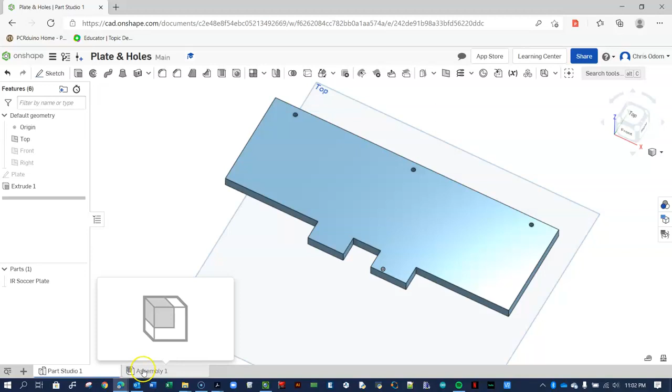An assembly is just an assembled mass of different parts. What we can do is insert the IR soccer plate that we just created. It's all in the same file, so you click and it places it in the workspace. Click OK, and there it is, same as the part.

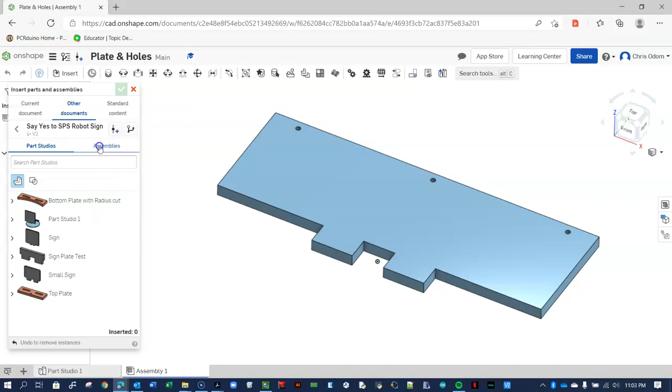But what we can do over here is add other parts to it. For example, I can go and insert assemblies from other documents, recently opened. I want to put in the little mount here, so I'm going to grab it from assemblies, other document assemblies. I click on chassis mount and move that over here for later use.

I can come back to other documents, recently opened again, and choose my line follower assembly. I need 3 of those, so there's 1, 2, and 3. I'm going to show you how we can put them all onto the board.

And then lastly, I need a spacer, a little small spacer here. I need 3 of those as well: 1, 2, and 3.

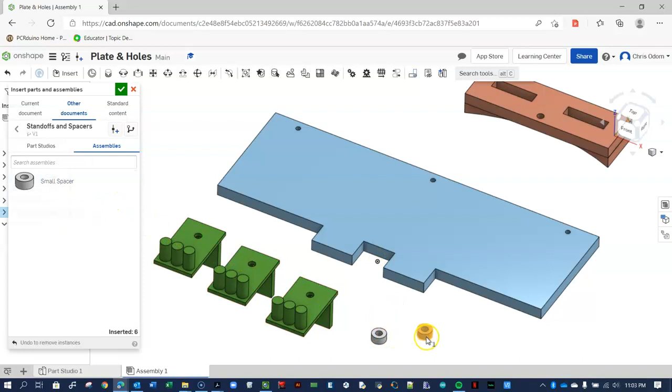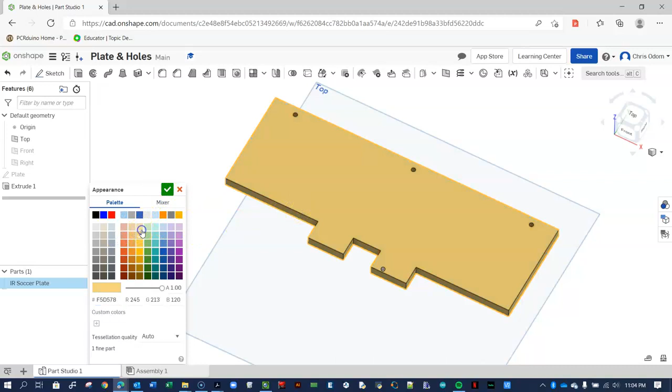Notice that these are all colored to kind of indicate what they are, and I can do that here. I can go back to the Part Studio, right-click on the soccer plate, and go to Edit Appearance, and make it some color, like a kind of woodish color. Press the checkbox, and now if I go back to Assembly, it's already updated and changed. So if I change the part, it changes it in the assembly.

Now what I want to do is put these guys on the plate. This is just cosmetic, but it does actually help you before you spend time and materials to cut, to make sure that your piece is going to work.

What we want to do is mate these to the board in such a way that they don't move. So we're going to use the fastened mate, the easiest one.

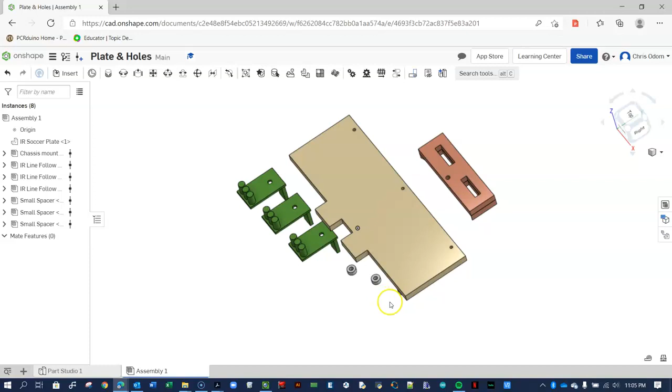The first thing I want to do is put these little white spacers here over the holes so we can elevate the line following sensor, and get it so that the resistors on the back -- these aren't great resistor drawings, but there they are, representations of the resistors -- aren't sitting on the plate itself. So we're going to use spacers to move that away.

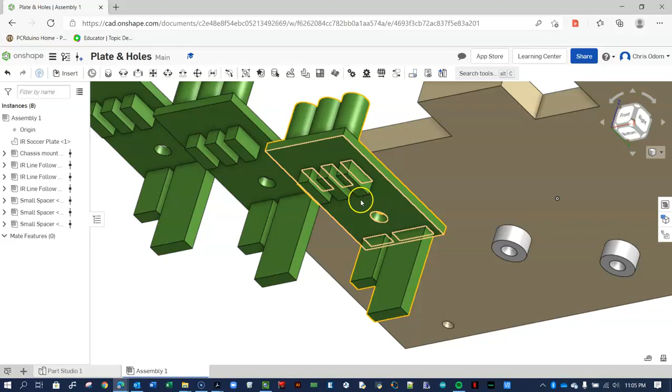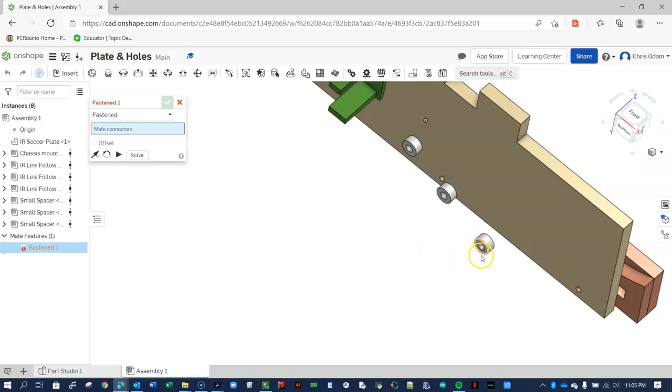All right, so here we go, here's how to do it. I'm going to be doing a lot of rotating with my right mouse button. I want this bottom piece here to mate with this top piece here, and I want the holes to be concentric. So I'm going to grab the fasten mate, zoom in with my zoom wheel, and you can see that orientation is pointing down, that's what I want. I could choose a different face, but I want this little circle, boom, right there.

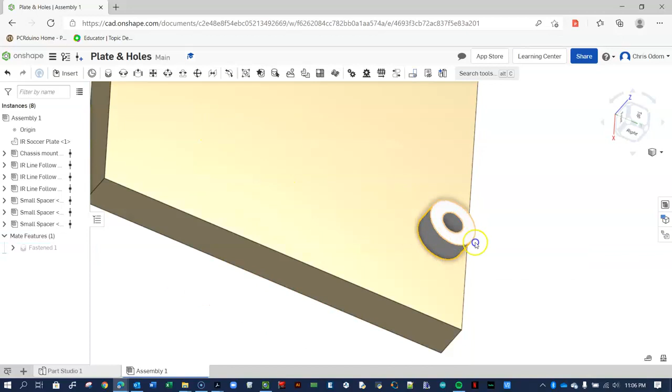So that is ready to be mated to this part right there. Okay, there they are. I mate, I press the checkbox, and we are good. That is now fastened to it. I'm going to do that 2 more times.

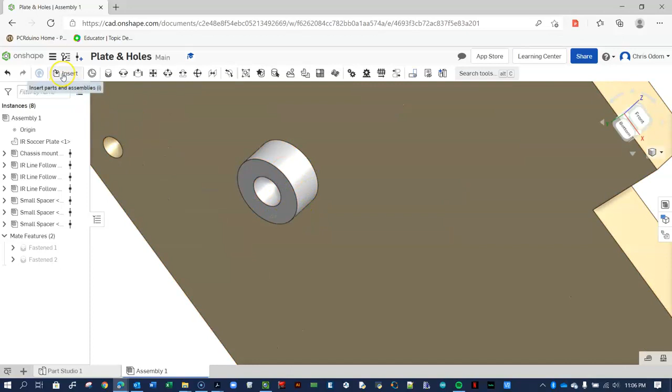Again, I want to grab the bottom of this guy here, and I will try to get the orientation. Boom. Okay, and there may be easier ways to do this. I'm kind of a beginner, but this is how it works for me, and class begins in a few hours, so I need to get on the move.

Okay, so here we go. Boom. So now, if I move the plate, those 3 spacers are going to come with me.

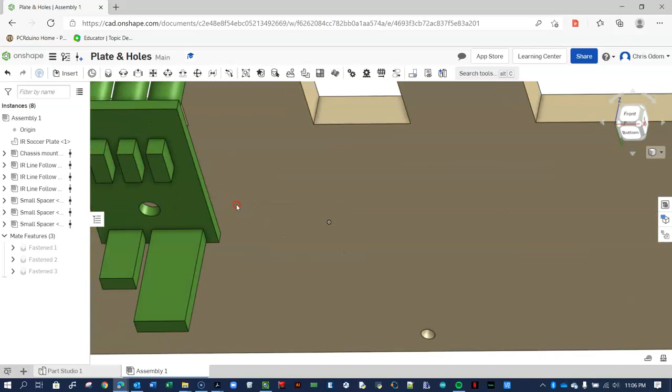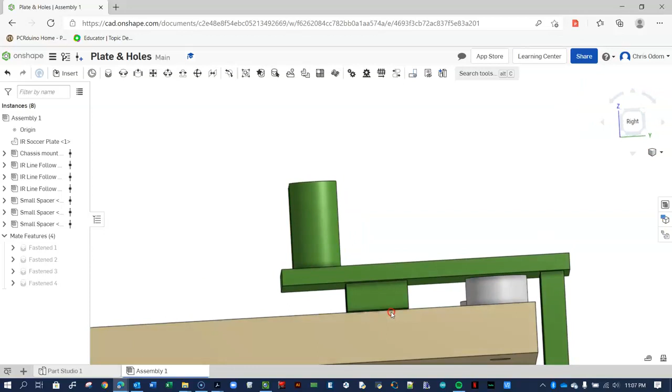All right, we're going to do the same thing here. I'm going to grab the bottom, that little hole of the sensor, and I want to mate it to the top hole up here. Okay, and press the checkbox, and you can see that the tolerance is really close. You can see there's a little bit of daylight there, but now I know that when I build this, that spacer is going to work for me. Also, I can see here that the tolerance for the little plugs that plug in here at the end of the sensor, that's also going to work. It's going to be tight, but it's not going to bind, which is what you want.

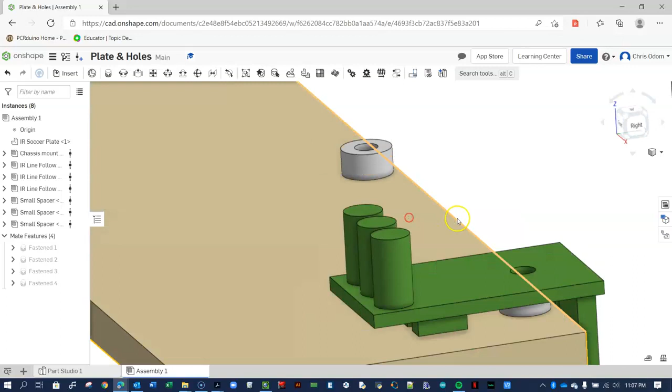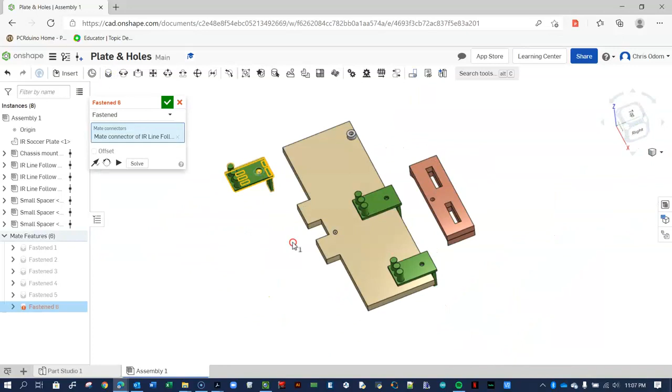Okay, do it 2 more times for the other 2 sensors. Boom. And we're going to mate it to the top there. You got to press the checkbox to say yes, that is good, and do the fasten mate one more time. Here, boom, boom. Okay. So far so good.

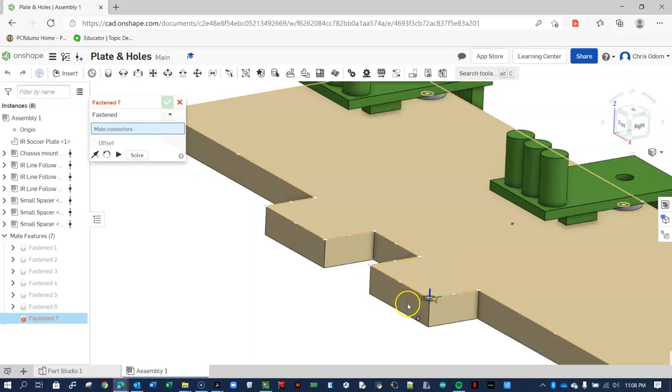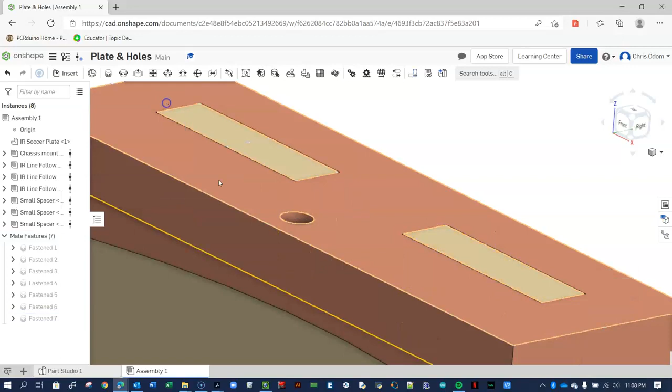Now, what we want to do now is I want this face here to go into the slot here. So I'm going to fasten the middle of this plate. You can see here there are a lot of faces here, a lot of corners and edges and things like that that you can try to fasten to, but I want that face, and you see how that blue arrow is pointing up, that blue line, that's what I want. Okay, and now I'm going to come over here and I'm going to kind of move around until there it goes right there. Boom. Okay, I press OK. And now that guy is mated there.

And so now we can sort of see what all this looks like. Okay? Kind of cool, right? And so without even fabricating it, you can tell what this is going to look like.

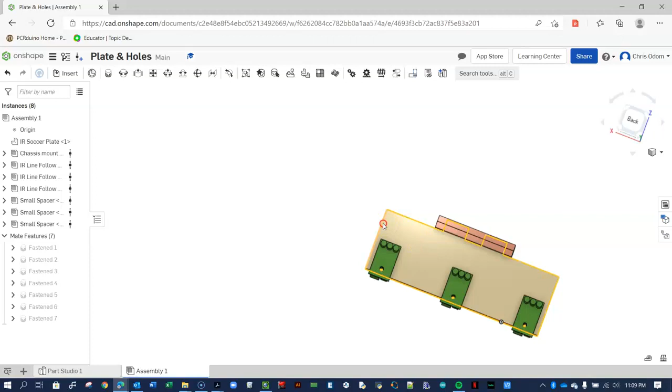Now, my students may think, oh, 6 inches, that's a lot of material. Maybe I want it a little bit smaller, or maybe I want it a little bit bigger, or maybe this may drag the ground. This may be so low that it drags the ground. Fear not. All you have to do is come and change your part.

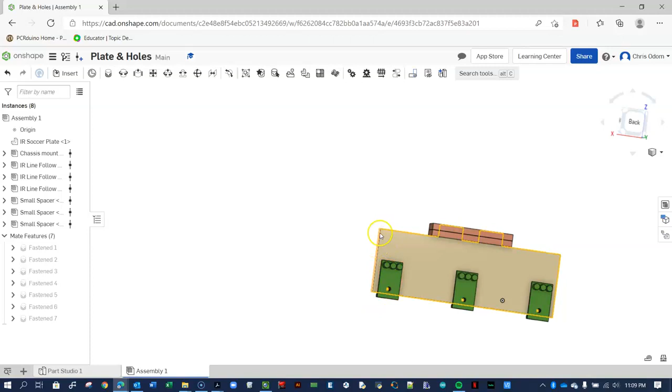Okay? So notice that here it's 6 inches apart, and I think we said it's 2 inches wide this way, 2 inches down. If we don't like those, we can come back to the Part Studio, double-click on the plate sketch, and now all we have to do is, if we want to, we can change this dimension, double-click on that dimension, and make it be 4 inches.

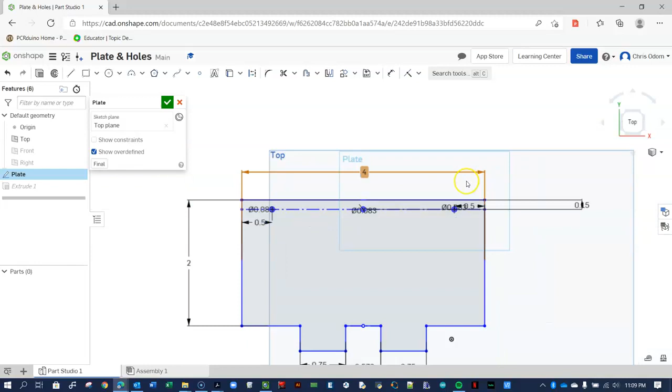Okay? Because everything was constrained, it's all brought in around the center. And then here, I forget exactly the size we need, but something like 1.2 inches, I think, is plenty. We can go find out. Okay, so now it's made a little bit smaller. Press the checkbox to accept it.

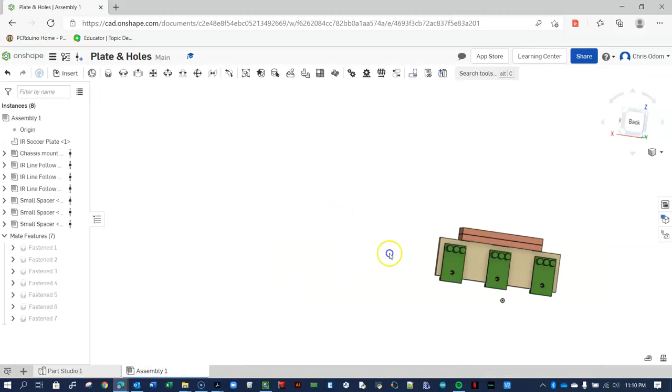Come over here to the assembly, and notice it took a little time to recalculate, and now it's a little bit less material, but everything moved due to the changes being made. So I think 2 inches is fine, or whatever it was, 1.2 inches is fine. There's plenty of clearance there. We could make it a little bit smaller.

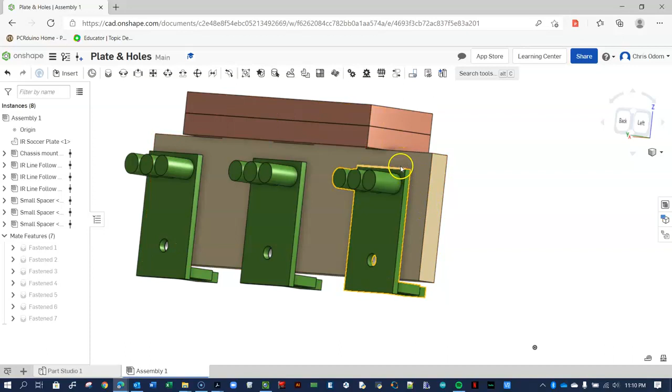Let's see what happens if we make it too small. I don't know what's going to happen. Let's see. So again, double click on the plate. We're back in the Part Studio. Let's see if we make this be something like 0.8 inches.

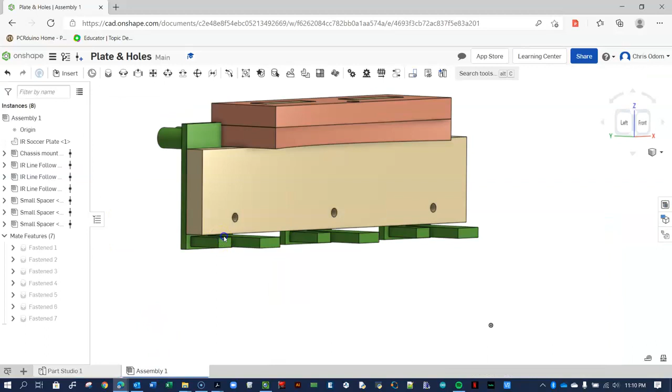Okay, it looks fine, right? There's nothing wrong with it here. But what happens when we go to the assembly? Ah, now we can see that this is not going to work, because the sensor is going to get jammed into this part, so that's not going to be good.

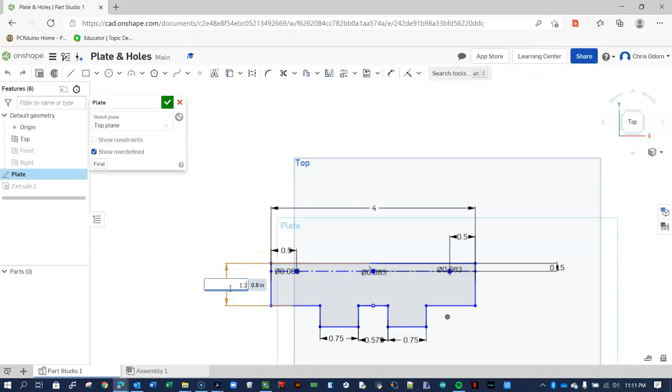Okay, so we just come back out here. Maybe we change it to 1.1 inches. It was 1.2. We could make it 1.1, and let's see if that's good. At some point you don't really care if it's super, super tight. That looks pretty good to me. And as long as your measurements are precise, then this is a pretty good estimation of what the actual thing is going to look like.

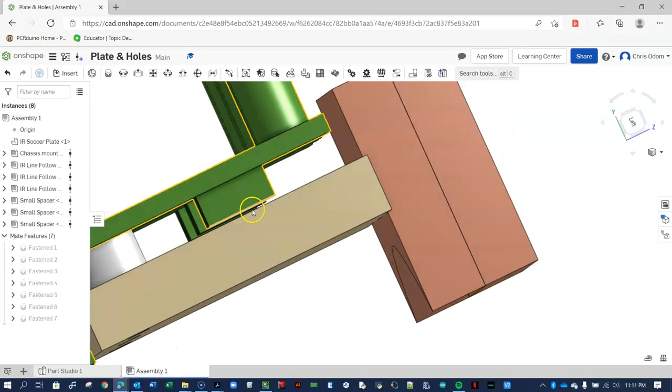Kind of nifty, huh? Anyway, that's not actually it for assemblies. I do want to show you one more cool thing.

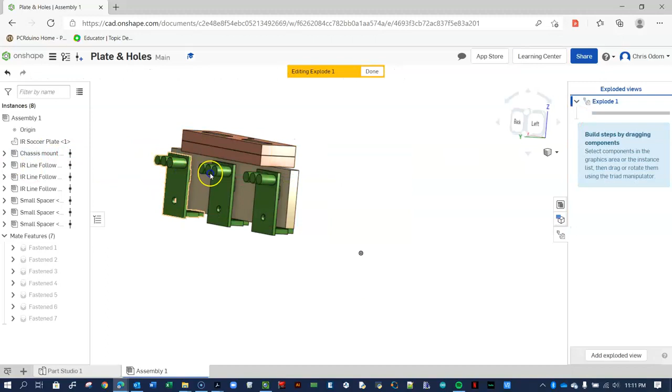Over here on the side, you've got this exploded view. And what we can do is add an exploded view. So what I'm going to do is come in here, let's see if I can move out and zoom in around again.

So I'm going to click on this guy, and grab that little outside arrow. See that little arrow there? I'm going to grab that arrow and drag it out in this direction. I'm going to do the same here and do the same there. I just click, okay.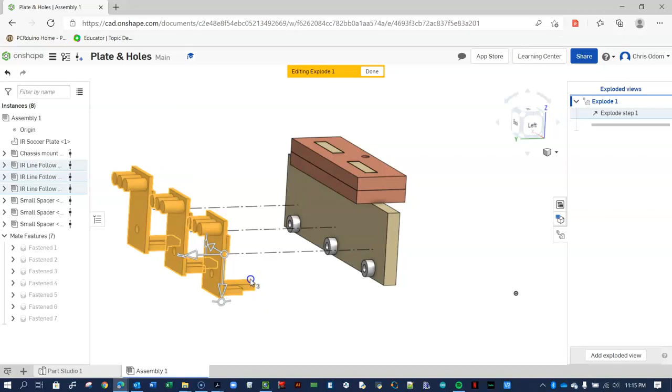Okay, and so now I'm done with this one. So I'm going to press the explode step 1. I'm going to give a checkbox like I'm happy with that. I'm going to click off, and that will unhighlight these guys here.

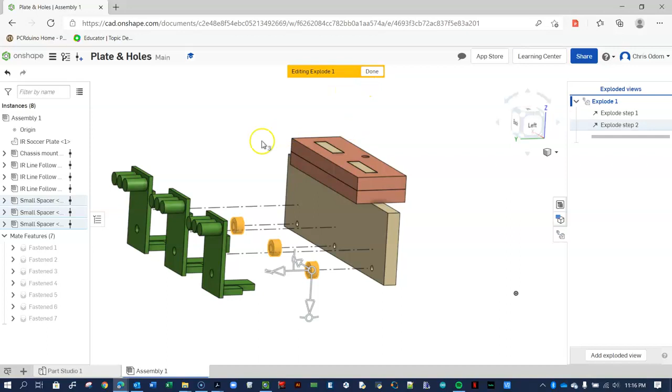Now let's do the same for the little spacers. So I'm just going to pull those out maybe halfway, click and click to do the same there. I'm happy with that, I press a checkbox. Let's do the same here.

Now, for some reason, these guys, whenever I made this, or earlier in my career with OnShape, apparently these were not fastened together. These were not mated. So I need to do that and do that again, and now I can check. But they should have been mated, I think.

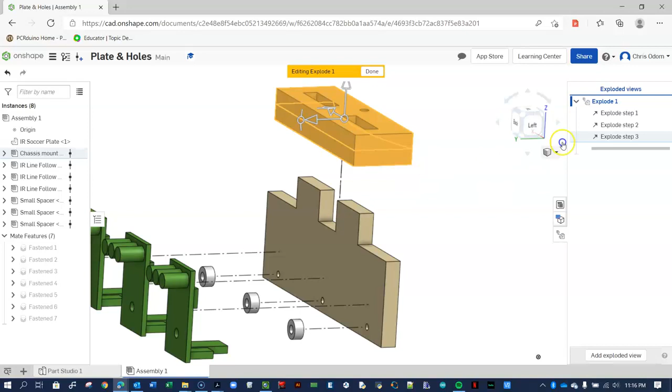All right, so we are done editing Explode 1, and there it is. If we ever wanted to see that again, all we have to do is double-click on Explode 1, and now we can get a better view. We can scroll around and take a look. I just think that is so much fun, and we can see the different parts of our assembly.

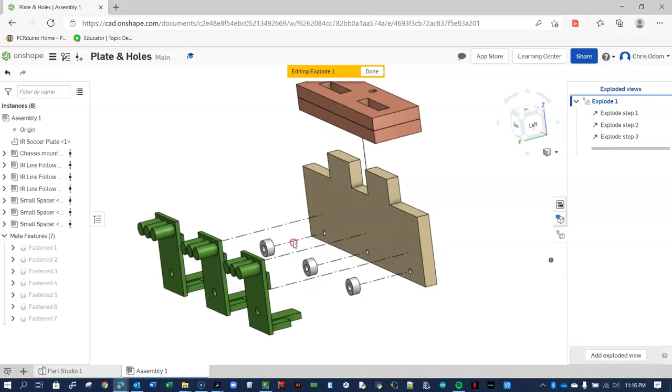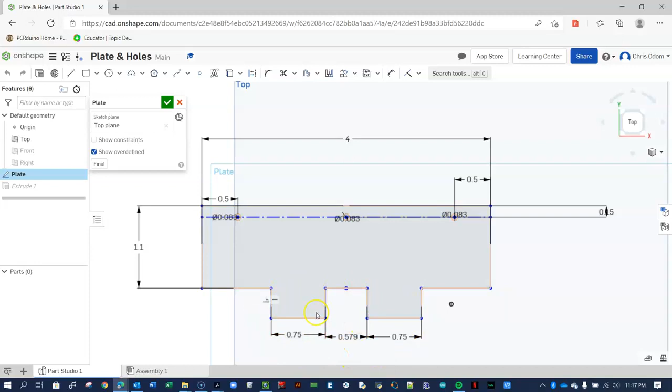All right, so we say done, and again, if we ever wanted to edit this part, it's in the plate sketch. We can change these values. Again, my students should not change these because these match with the mount that goes on your robot, and you should not change the 0.15 value, because that tolerance is pretty tight to get the wires of the sensor over the edge of the plate.

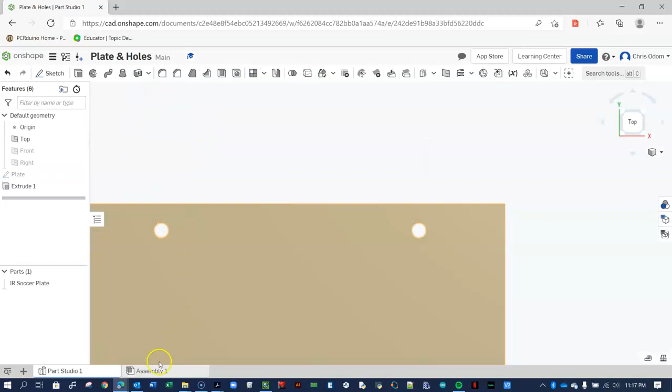Okay, I think that is it. And if we wanted to, we could rename this assembly. I should just put the last thing, IR soccer sensor full assembly, something like that.

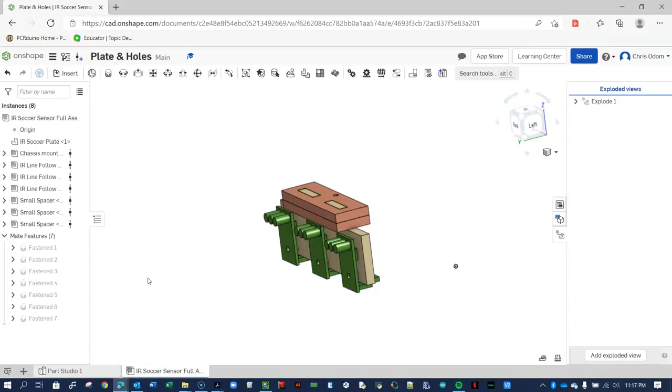So in case we wanted to make a robot, make a one-bot in OnShape, we could then grab this whole full assembly and then stick this entire assembly onto the one-bot robot.